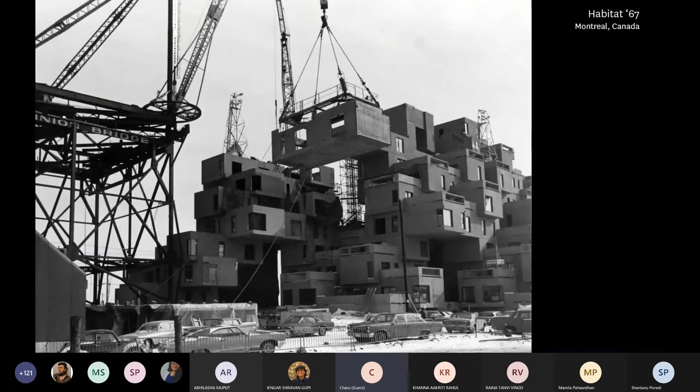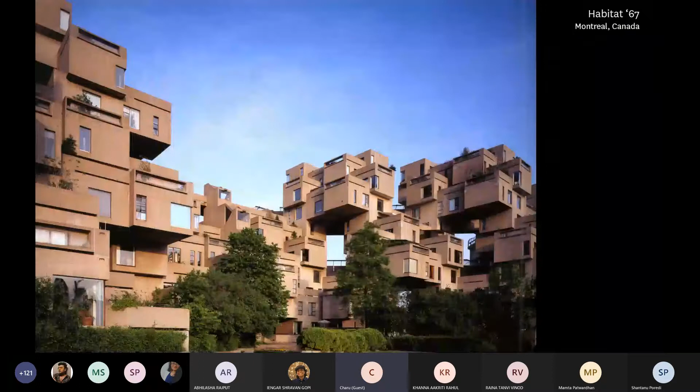I want to take you back in history, 1967, more than 50 years ago. A young architect, a young student in his early 20s, decided to rethink the design of an apartment building. He did that by arranging the blocks three-dimensionally in a way that would give them more daylight and ventilation, breaking the traditional form of orthogonal high-rise structures and stacking prefabricated concrete boxes of different geometrical configurations, locating each box so that it stepped back from its immediate neighbor. This provided each apartment with a roof garden and a constant flow of fresh air and maximum natural light, qualities that were unprecedented for a 12-story apartment building.

Habitat 67 was born. Habitat 67 pioneered the integration of two housing typologies: the suburban garden home and the economical high-rise building. This visionary designer is none other than Mr. Moshe Safdie, who has spent a lifetime designing architecture based on humanist principles.

'For everyone a garden' has been his motto, a beautiful notion that sees architecture as a generous act of connecting us to nature, creating meaningful spaces of community that serve as a catalyst for vibrant public life. And I'm very proud to say that I'm part of this special team of people, this design studio led by Mr. Moshe Safdie, where we design and build spaces to be enjoyed by all.

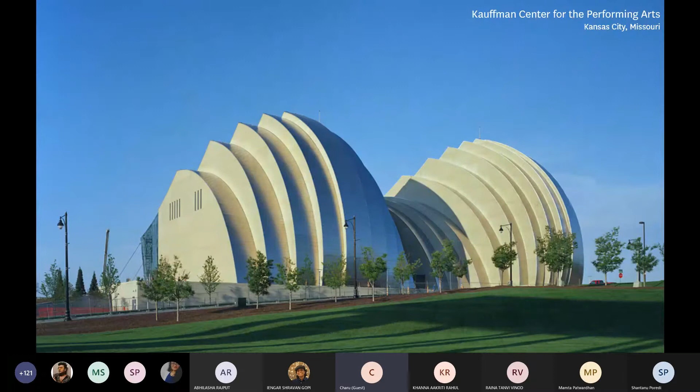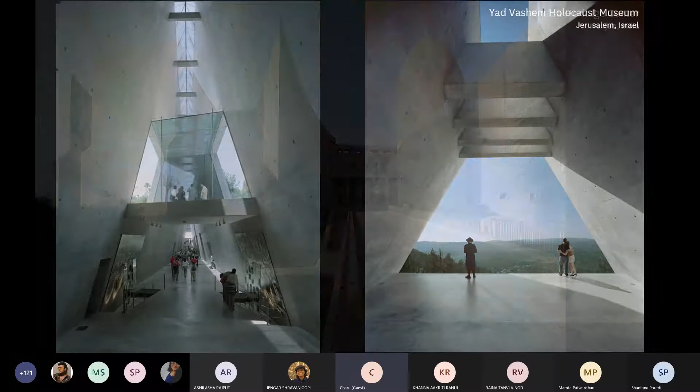In what we do, we have a global and lasting presence in the form of wonderful buildings for millions of people to enjoy. Whether it's a performing arts center like the Kauffman Center in Kansas City, or a library in Salt Lake City, Utah, or a Holocaust Museum in Jerusalem, Israel, or even the Khalsa Heritage Center in India, in Punjab. I hope you guys have seen this.

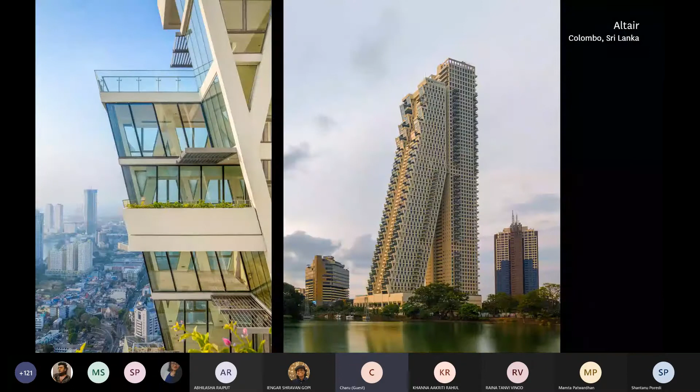Whether it's a headquarters for the United States Institute of Peace, or a mega mixed-use project in Chongqing, China, or even a residential tower in Colombo, Sri Lanka, we have always believed that a project's larger civic role should be considered at the heart of every design. Because we truly believe that buildings have a strong presence and they need to be built with a lot of understanding and care.

Buildings make a strong impact beyond the piece of land on which they are built. They improve the quality of people who use them. I would like to take you on a journey and show you some of our projects in Singapore to demonstrate this principle. Let's start with Singapore, which is a small island nation with the highest urban population in Southeast Asia.

We've been really fortunate in designing a variety of building types in this tiny country. I want to begin with Marina Bay Sands, Singapore, which I think you're all familiar with. The site of Marina Bay Sands was a 35-acre reclaimed land at the edge of the financial district.

It's an amazing site, visible from downtown Singapore and from all other sides of the city. We were awarded this mega project through an international design competition. This is a high-density, mixed-use integrated resort that brings together multiple programs: hotels, convention centers, shopping, dining, theaters, you name it, all across the bay from Singapore's Central Business District.

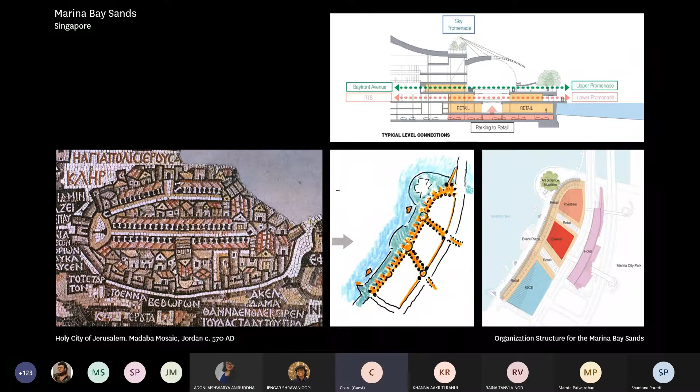Our team explored a variation of this concept, integrating the waterfront of the Singapore River and the Promenade, creating streets that connected to public transportation. This resulted in a new kind of urban meeting place that became a vibrant location for recreational activity.

It wasn't just in plan that we were looking at this connection, but the massing configuration was also very important. Because this was a mega project, a huge project, we wanted to make sure we were humanizing the mega scale.

What was very important to us was the way it would be viewed from across the waterfront. So we created a three-dimensional hierarchy that addresses the issue of mega scale, organized from the shorter components to the taller construct, directing a viewer's eye from the arcade of the buildings to the Skypark. This really helped create an urban landscape that worked with the human scale.

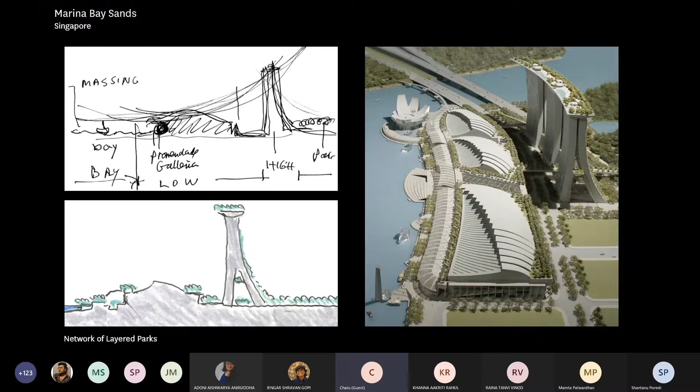The series of landscape gardens extend from the tropical green landscape of the river to the different roofs and up to the Skypark. This really helped create publicly accessible levels along the Bayfront Promenade.

The public promenade really stitches the gap between the city and our project. This public promenade changes during the night. It is a space used for daily recreational activities by residents and transforms in the evening into a gathering space for a variety of events.

Use of color and geometric patterns in our interior design really made the spaces very lively and interesting, with integration of art and architecture.

Large-scale installations created by 8 internationally renowned artists were seamlessly integrated throughout the building, whether it was a chandelier designed by Antony Gormley or artwork done by other artists. This site-specific artwork extended from the 23-story atrium of the hotel to the exterior of the building, creating an inspiring and breathtaking path through the Marina Bay Sands hotels.

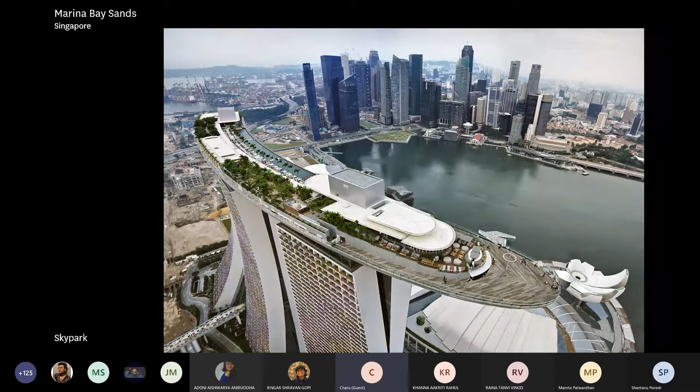When you're designing projects, it's not just about creating the program or following all the briefs the client gives us, but also about what you can add for the community, for the society, for the neighborhood. This became an important task for a project like this. The promenade on the waterfront, the Skypark, all added to the dynamics of the project.

As you all must have seen in pictures, the infinity pool that stretches from Tower 1 to Tower 3 is a big attraction to locals and tourists from all over the world. It's been featured in magazines, it's featured in movies, and has really made Singapore very famous, and Marina Bay Sands very famous too.

The Art Science Museum, which is on the promenade around the waterfront, exhibits and co-locates and bridges the gap between the arts and sciences. The museum is organized as major exhibition spaces positioned around a central open space atrium.

As you can see in the section, the first exhibit is up on level 2, and we also have gallery spaces below in the basement, below the water, below the lily ponds.

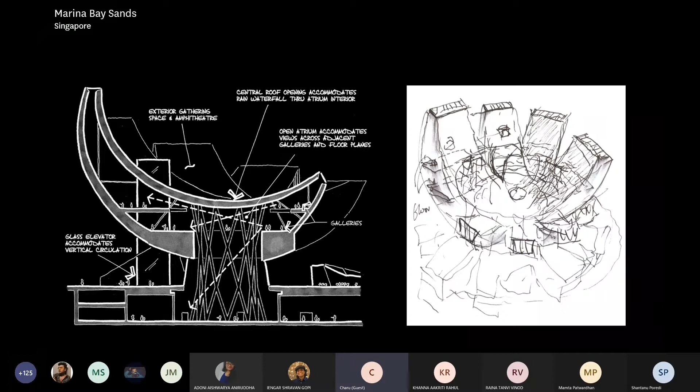Each exhibition hall has access to daylight, from the skylight above and from the central atrium. We've integrated lighting controls and mechanisms that allow the spaces to be transformed into black boxes, and sometimes the windows from the gallery are used to really get natural light shining on the exhibits that are displayed.

The Art Science Museum, as you can see in this picture, is supported by a steel lattice diagrid and 10 steel columns. The center itself is like a sculptural centerpiece, and that gives the building the appearance of floating above the water.

The reflecting pool here definitely creates a semi-covered public space, and so this is another public space that was created by us. It didn't have to be part of the museum, in the sense that you didn't have to visit the gallery to visit the space.

The facade itself is clad by FRP, fiber reinforced polymer, which is generally used for yachts and ships. This facade acts as a dynamic screen for projections. The Singapore government uses it to project depending on the season. Like today, they're celebrating National Day, so I'm sure they've projected the national flag on this facade.

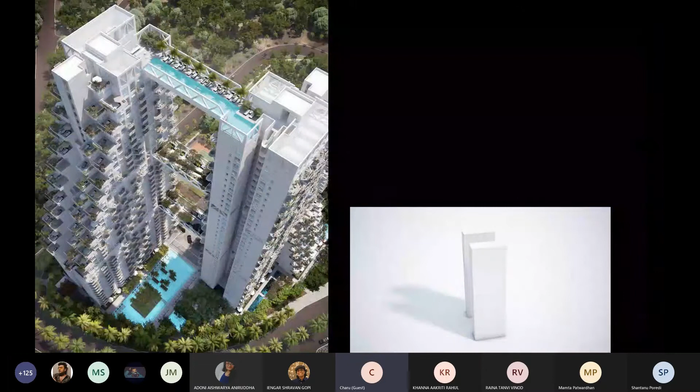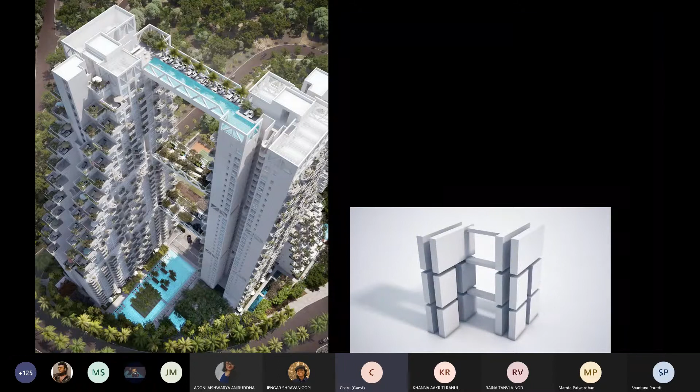With the fractal geometry surface pattern, I hope you can see in the animation the dramatic stepping structure and network of gardens open to the sky. Sky Habitat is part of a series of global projects evolving from Habitat 67, the one I showed you in the beginning.

Instead of independent towers, the building's two towers are linked by three bridging sky gardens. The end result is really a three-dimensional matrix of homes with terraces, balconies, and communal gardens. It brings landscape, light, and air to every level of the building. The units feature multiple orientations relative to the sun and provide generous views to the outside.

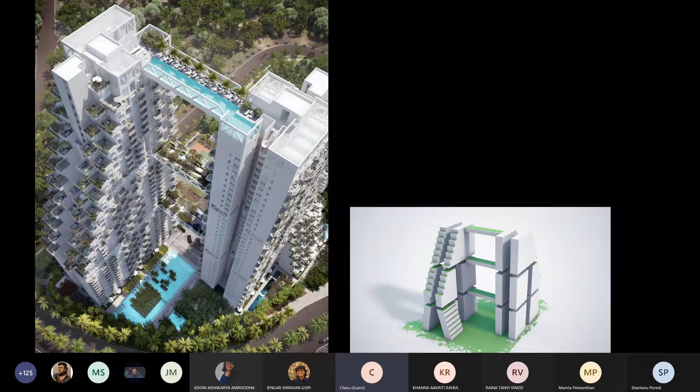The strongest visual feature of the building is the stepped elevation of the tower. More than a third of the units are located along the stepping edges with access to penthouse-like exterior roof terrace gardens. Three bridging sky gardens link these two stepping towers, creating interconnected streets, gardens, and terraces in the air, providing a variety of spaces for common recreation and congregation.

You have to understand that during COVID, when people were locked in their apartments and could not go out, these spaces—when you design spaces like this—are the spaces that bring people together. You can safely interact with each other. People could step out and breathe freely, breathe natural air. The balconies helped, the terraces helped.

I think that when you're designing an apartment building, generally speaking, the developers will give you a certain program—we need so many 2-bedroom units, 3-bedroom units. It's our duty to create these spaces. It's our duty to prove to them that you can use these.

For example, the bridges are not just used for structural support, but you can create landscape areas, landscape zones—it's almost like streets, gardens. You can create public spaces that belong to one and all, to the whole community.

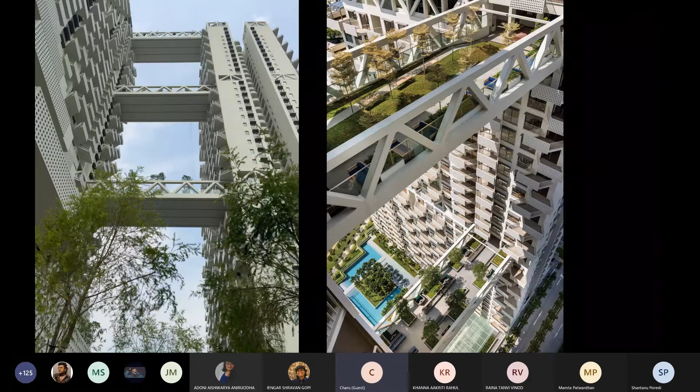We were able to create a garden, almost 70% of the site—which is a very tight site—developed into a series of additional gardens, outdoor event spaces, swimming pools, tennis courts, and walking paths. So when you add the bridges to it, whatever the site area was, we were able to provide more than 100% green area as the end result.

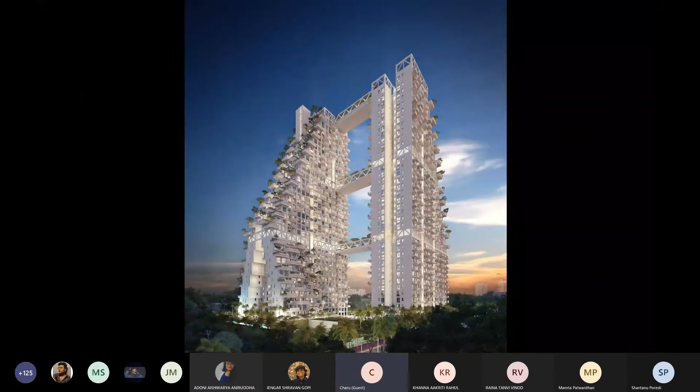While providing great quality of life and mitigating the sense of density in areas like this, we have to maximize contact with nature. The result, especially the result of our project, is a village-like clustering of residential units that integrates architecture and plant life into a singular experience. I want to take this experience further, where we integrate architecture and plant life in our next project, which is Jewel Changi Airport.

Jewel Changi Airport was also a design competition. Located in the center of Changi Airport, which has 3 separate terminals as you can see in the drawing, Jewel is sandwiched between a control tower—the red dot that you see—and Terminal 1. This site used to be an open air car park with a train running through it, connecting Terminal 2 and Terminal 3. Very tight site, and the competition design program required aviation, shopping, parking.

Putting these programs together was very challenging, but we strongly believe that in addition to fulfilling the brief, our design should include a timeless attraction—an attraction that would be for the whole community, for travelers as well as for locals. A community garden that would be centered around a tall waterfall.

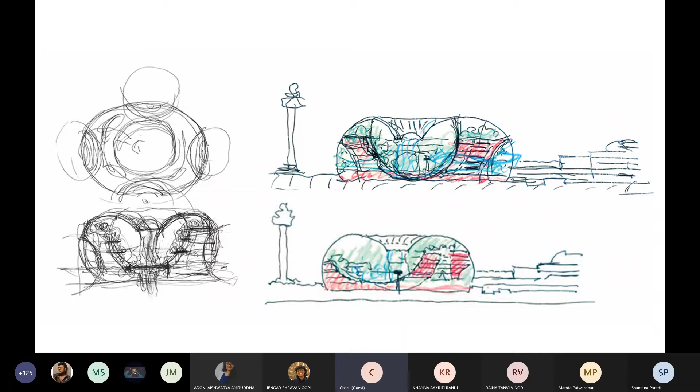Our design proposal consisted of more than 135,000 square meters of space spread across 10 floors, connecting all three terminals. The 10 floors were like 5 floors in the basement and 5 floors above ground.

Now, contrary to the traditional retail practice where shopping is the main focus as you enter a mall, the focus of our project was a 15,000 square meter public garden without any commercial activity, accessible 24 hours, 7 days a week. So this garden was the main feature of our project.

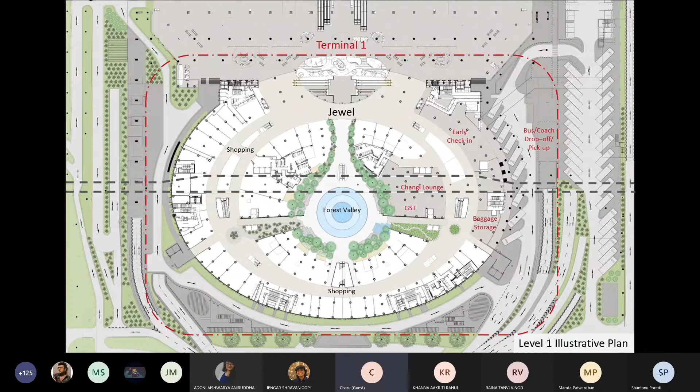The waterfall centered in the garden created an amazing serene space in the heart of the garden. This garden is neither a decorative display nor a simple botanical exhibit within the building, but it's a landscape of grandeur and wonder.

This very complex project, we had a lot of consultants to help us out. Working with these amazing engineers at Buro Happold from New York, they helped us rationalize the form of the building. The form is very complex—it's a non-symmetrical toroid, non-symmetrical because of the waterfall above and because the train went through the center of the building. So we had to make it non-symmetrical where the oculus shifted down south.

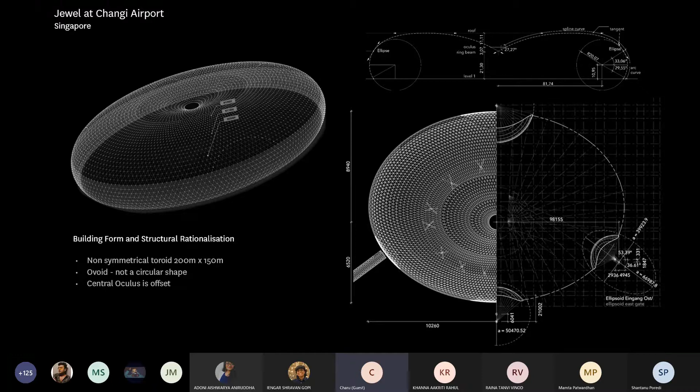Buro Happold helped us create a delicate diagonal shell structure to cover the garden and space. They helped us rationalize the form and helped us with the design of the whole diagonal system.

We also had help from our environmental engineers at Atelier Ten, who helped us design the comfort of humans and trees. We used different strategies like selecting the right glazing, with high visual light transmittance and low solar gains, so we could help the growth of the plants without increasing the heat in the building. We also used radiant floor cooling to create a comfortable environment.

Our environmental engineers also helped us with mapping the daylight so that our landscape designers could select trees based on the actual light that the building received.

At the topmost level, where we were very close to the roof and the sun, compared to level one, we selected trees that provided shade, like canopy trees. But as you come down the step garden, which we call the forest valley, the trees were tall so that the light could filter down to the shrubs below.

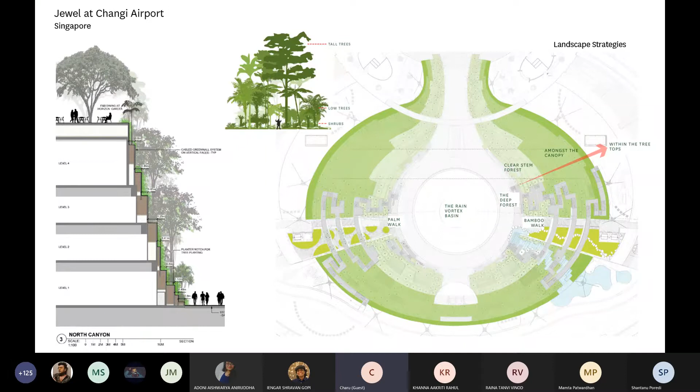We did full-size mock-ups to resolve issues so that we could have a smooth construction process. The mock-ups helped us understand the landscape elements, the paving design, how materials came together, combination of plants. We could study all that in advance.

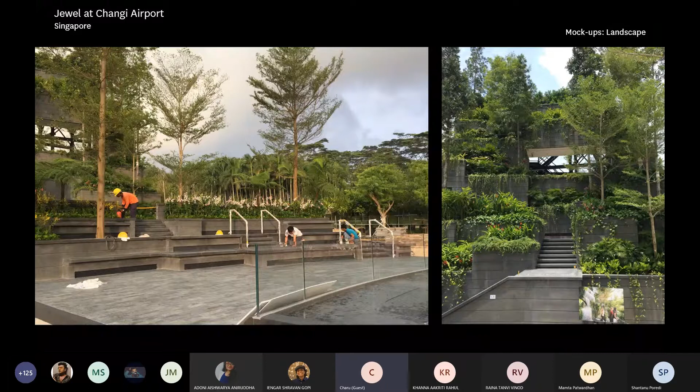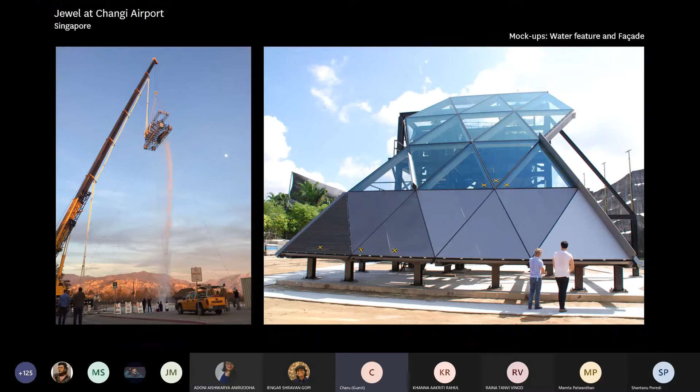We also did facade mock-ups to study the whole facade system, basically to see how the glass came together, the nodes came together, the diagonal system. As well as we did a mock-up of the water feature to study how the water falls from a height of 40 meters. We did this so that we could have a smooth construction process.

But our construction process was not an issue as much as the site was, because the site was so tight, sandwiched between the control tower and an active Terminal 1. The terminal did not close, not for a single day. It was very active, and Changi Airport is extremely busy. So this was an absolute nightmare for the contractor. They had very limited access, and they had deadlines for completion because it impacted the terminal.

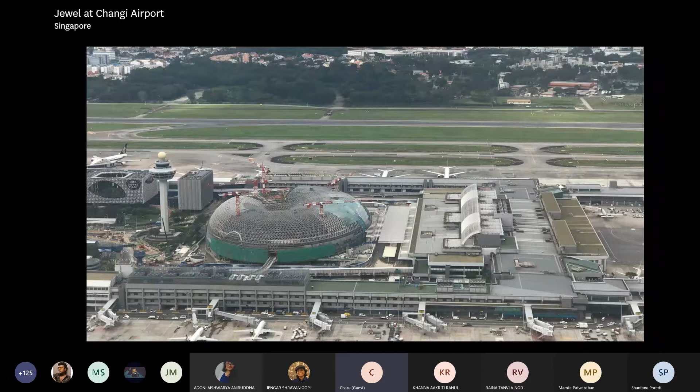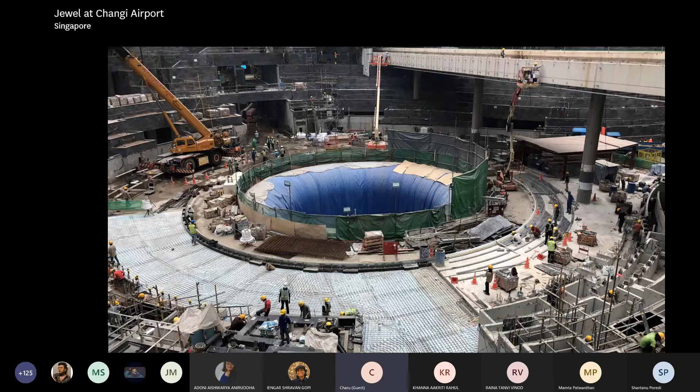This picture was taken during construction, and as you can see, it completely fills the site. Because of that, whether outside or inside, working was always a challenge because there were so many teams working together. Here you can see the radiant cooling system being installed. At the same time, concrete work is being done on one side, and on the other side, stone paving is going on. It's like they're lifting up trees, all sorts of things happening at the same time.

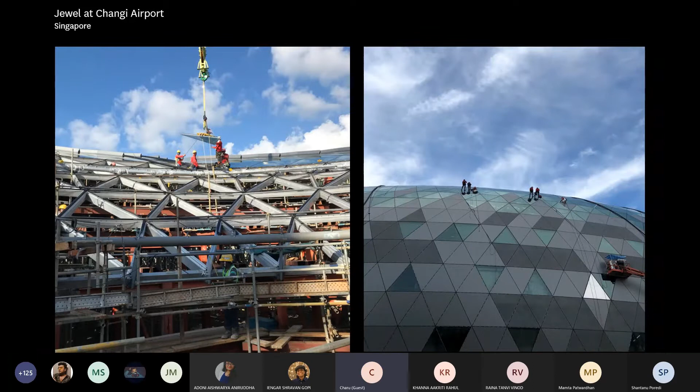Glass outside itself was a challenging process because of the shape of the building. We had to use specialists to install the glass facade, we call them the Spider-Man. They had to really climb on ropes, and using ropes, they installed the glass. It was an amazing sight.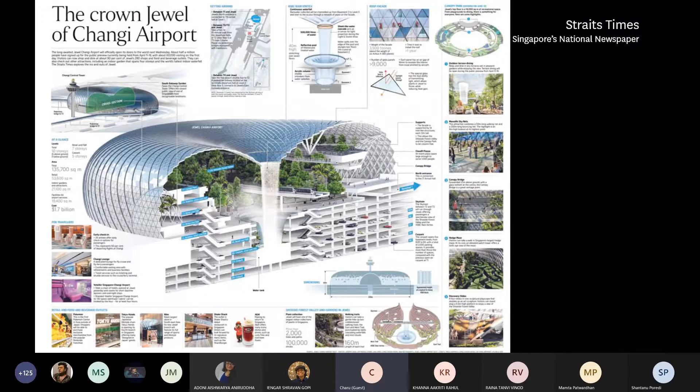Amazing structure, very, very complex. One of the most complex projects done by us, which needed everything to be integrated. It was so amazing and so complex that people were interested and curious all over the world, so much that the local newspaper had a center page describing how the design and creation was happening, with a whole graphic setup explaining the various aspects of the design of the project.

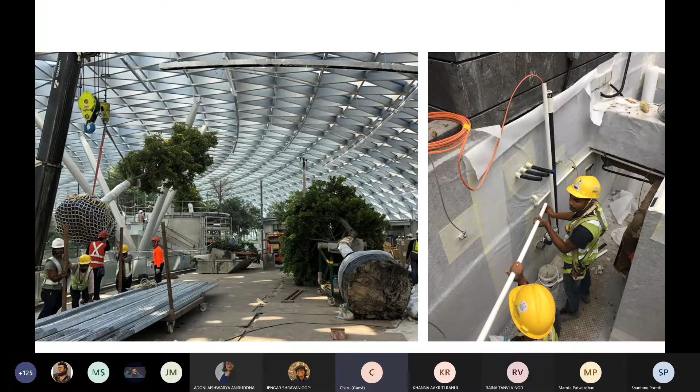We have more than 2,000 trees and more than 100,000 shrubs from all over the world, all set in planters on the concrete wall. The planters also had to accommodate all the services, because that was the only way we could get the air conditioning, lighting, cameras, tree washing poles, and a lot of other things in. It was a major coordination exercise involving different building trades, engineers, and construction teams.

The project is a technical marvel, from digital engineering to automated fabrication, from precision manufacturing to on-site assembly. The structure of the building, everything in it, represents radical advancement in emerging technology.

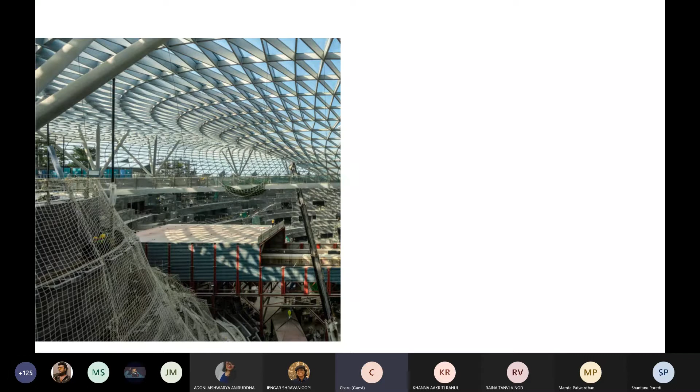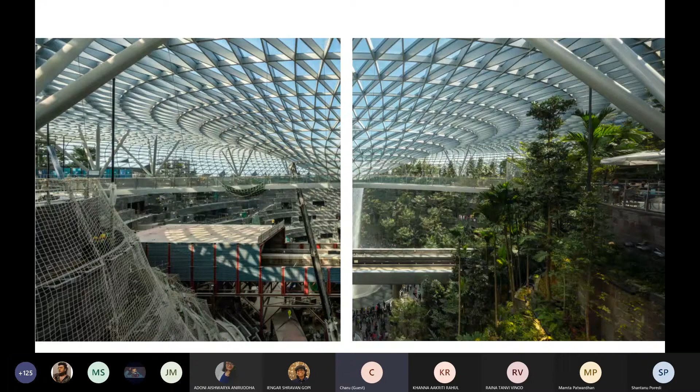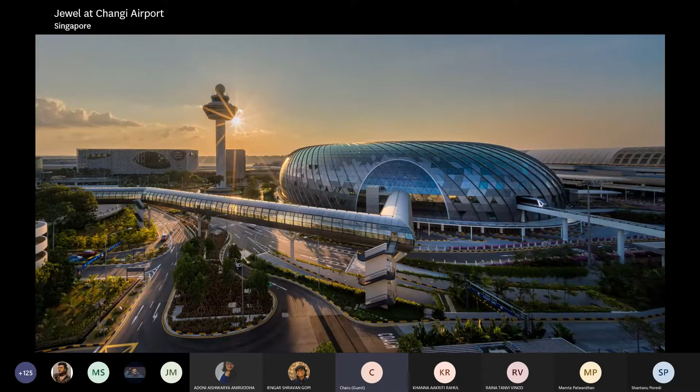The garden is built entirely on structure. This needed huge collaboration between the architects, landscape architects, environmental engineers, structural engineers, contractors, all working towards a common goal of creating something really beautiful and wonderful. A great building is all about relationships at the end—relationships between the materials, between the people, different teams all working together.

It's well connected to Terminal 2 and Terminal 3 with link bridges, making it convenient for locals and travelers to access the building. It's also the first place many visitors appreciate upon arrival in Singapore. We call it the new gateway to Singapore.

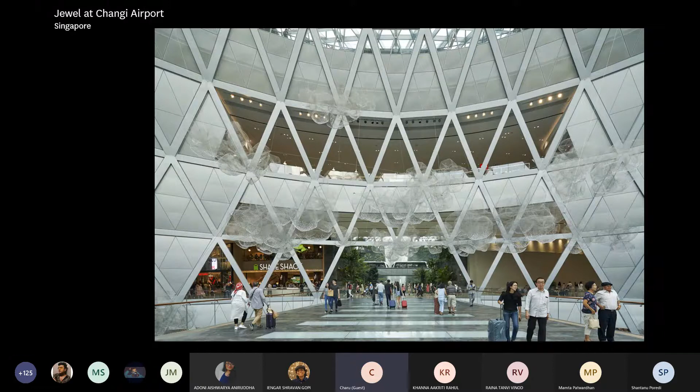It is a new building paradigm for airports, where a range of facilities from landside airport operations like the lounges, early check-in, luggage, combined with shopping, commercial areas and entertainment, all reside under one roof.

In a comfortably air-conditioned space, Jewel introduces people to the wonders of plant life and opens their eyes to the natural world. It brings natural light through a 14-meter high acrylic funnel, extending the wonder of the planting and natural light down to the basement areas, which otherwise tend to be dull and dark.

It has become a precedent where nature and city are one, where a traveler really feels rejuvenated, because after traveling for so many hours, this is very refreshing. Local residents are enthralled by what the place offers their families in terms of entertainment. The whole of level 5 has attractions where the family can spend all day together.

It is a building that belongs to everyone—locals, travelers, visitors. The space is packed with people taking photos and wondering how did they do it. People are filled with a sense of wonder. There's a smile on everyone's face when they enter the building. The senior citizens on wheelchairs sit in peace and enjoy nature in a very comfortable environment.